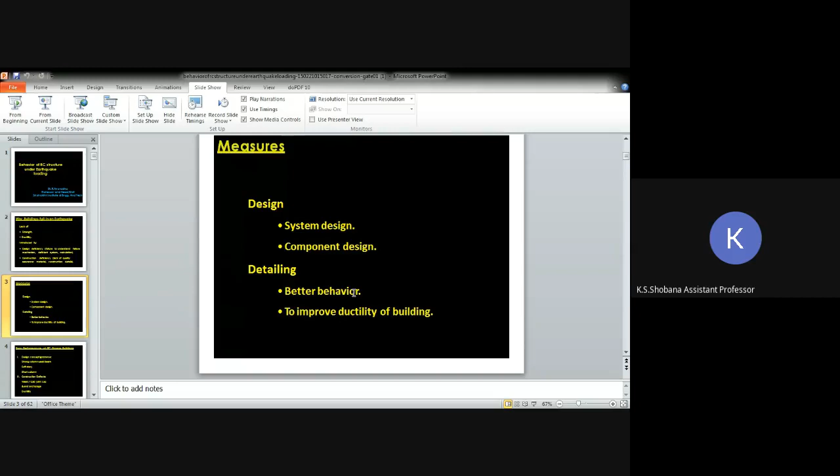It has changed, okay, now it is changing now. Yes, change ma'am, okay?

Okay yes ma'am. So again, I'm repeating why buildings fail in an earthquake. This is due to lack of strength and ductility. Strength, we civil engineers know is very important, and as structural engineers we should know what ductility is - buildings fail due to earthquake based on this.

This is introduced by design deficiency - due to failure to understand the failure mechanism, deficient system, and calculations in the design. Deficiency in calculation causes the structure to fail due to earthquake.

Next, construction deficiency - mainly we have to concentrate on the quality of material and construction detailing given to the structure. If both deficiencies occur, then the building fails. This is a general thing.

While going for the measures we have to take, we go for design and detailing. In design, there is system design and component design. In detailing, better behavior improves the ductility of the building, which is very important for earthquake structures.

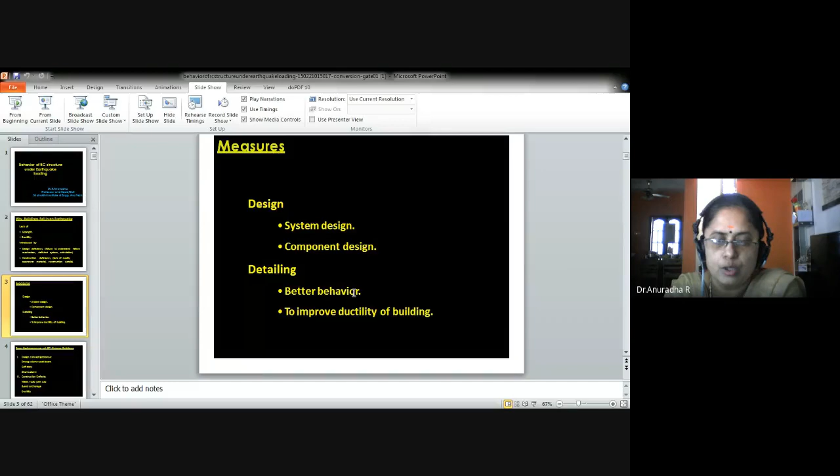So here we are going to see the behavior of the structures - how they behave in an earthquake - not about the measures. This is a general thing. Next is poor performance of RC frame buildings.

How do framed buildings perform poorly when lateral force or earthquake occurs? This is mainly due to two concepts: one is design concept ignorance, and second is construction defects. Design concept ignorance comes under strong column-weak beam, soft story, and short column.

We will see these one by one in the upcoming slides. The second concept, construction defects, is due to weak or cold joint, lapping, anchoring, and ductility - specifically lapping of reinforcement, anchoring of reinforcement, and ductility.

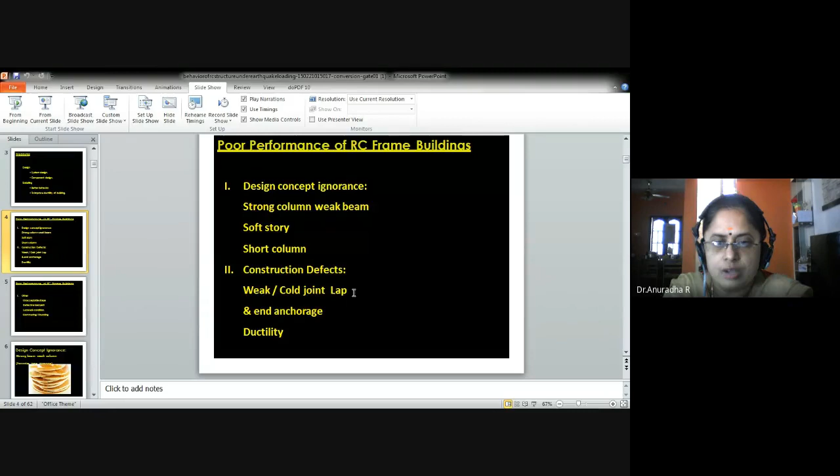These defects cause poor performance of the structure whenever lateral force occurs.

Next, other general issues include unacceptable shape. Generally, structural engineers don't concentrate on shapes, but architects focus only on shape and aesthetic appearance. If an unacceptable shape occurs, there is a chance of collapse in the structure due to earthquake, along with defective load path.

We know very well how load should transfer from the slab to the soil - a defective load path makes the structure fail. Local soil condition is also very important nowadays - without a geotechnical certificate, we cannot proceed with any structural consultation or construction.

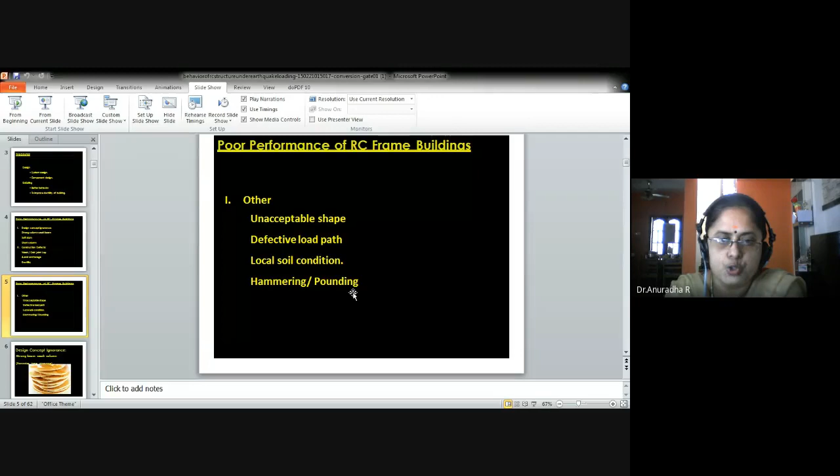Next is hammering and pounding, which happens in loose soils. Next, we will see design concept ignorance first.

So, strong beam-weak column concept. Here you are seeing pancake type damage - have you ever seen this type of damage in any structure? What is pancake? See how it collapses one by one, floor by floor. Have you ever seen this type of damage in any structure?

So we will see that. Here you can see this pancake type damage. All the beams are very safe, but all the columns have totally collapsed. This type of collapsing structure due to the earthquake we call pancake type damage structure. This type of structure happens whenever the beam is very strong and the column is very weak, resulting in pancake type damage.

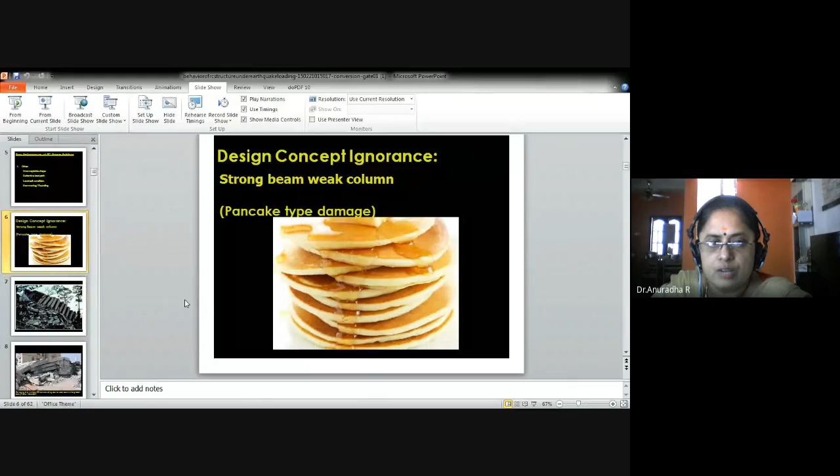You can see the pancake, one over the other, just like this structure is also one over other. But there is no column, all the columns are totally damaged. This is one of the collapses of a multi-story RC frame building due to weak column, strong beam design. This happened in the Bhuj earthquake in India in 2001.

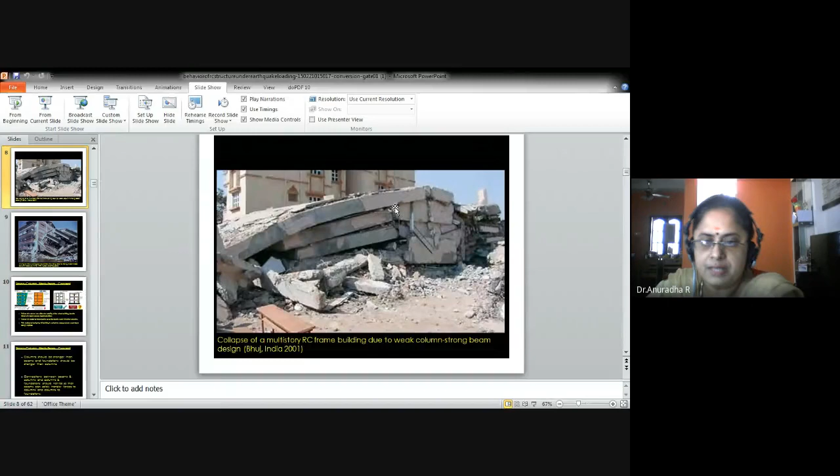Again you can see the beam is very strong, so the slab and beam are safe here but the columns are totally collapsed. This is called pancake type collapse, occurring due to the strong beam and weak column concept. Here is another example: multiple story collapse in a 6-story building due to strong beam and weak column design in the Turkey earthquake. Here also all the beams are safe, but no columns remain between the floors.

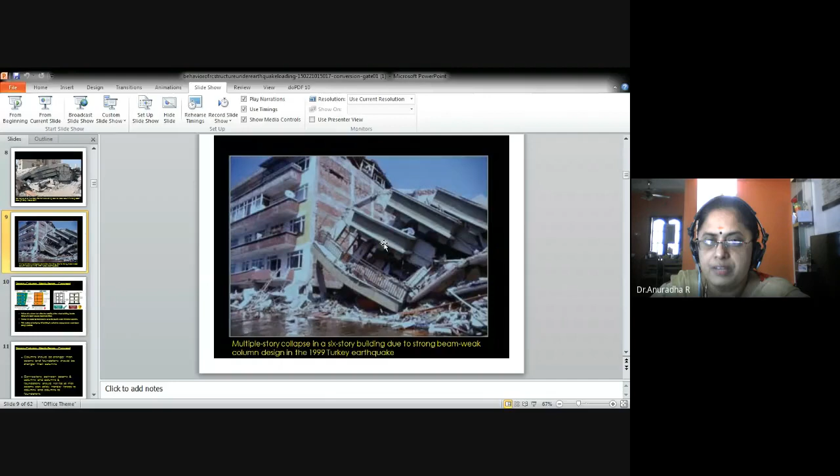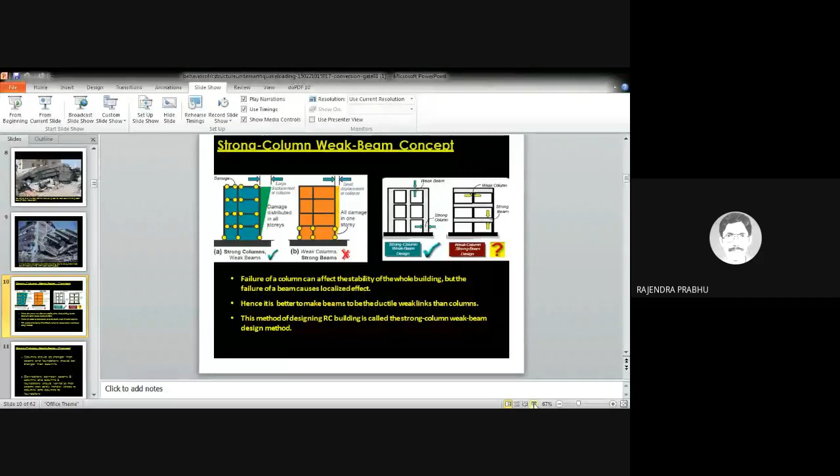Madam, can you please make it full screen? That is what I have made, sir, but it is not coming. Can you see it now? No, it is not full screen actually. Ma'am, there is an icon at the bottom portion of the screen. Oh yeah, that one. Is it showing, sir? No, not yet. I did this also from the beginning, from the top. Again, can you see it now? No, not yet. I don't know what happened. If you are seeing on mobile, you can make it somewhat bigger so you can see the pictures. Can it start, sir? Can I start? Yes ma'am.

Okay, we'll move on to the strong column and weak beam concept. In the first figure you can see strong columns and weak beam. Now the slide is in the first title slide, ma'am. Okay, now it's okay.

So all the columns are very, very strong compared to the beams. Here you can see strong column, weak beams. The beams are totally weak compared to the column. This concept is given here: strong column with weak beams, where the beams are totally weak and the columns are very strong, as shown in the first figure.

So whenever lateral forces occur, or the earthquake occurs, vibration occurs, we call it a lateral force. Whenever it occurs to the structure, there will be a large displacement at collapse, and damage distributed in all the stories. You can see these yellow circles, this is where damage occurs, in all the stories. This makes the structure somewhat safe, so we can save the lives of the people inside if this type of concept is used.

Whenever it's weak column and strong beams, the displacement is very small at collapse, and all the damage occurs in one story only, because all the beams are very strong. There will not be any ductility occurring in those beams, and all the load is taken by that particular story only. So all the columns fail there, making the structure fail and collapse totally. So this weak column, strong beam concept we should never use.

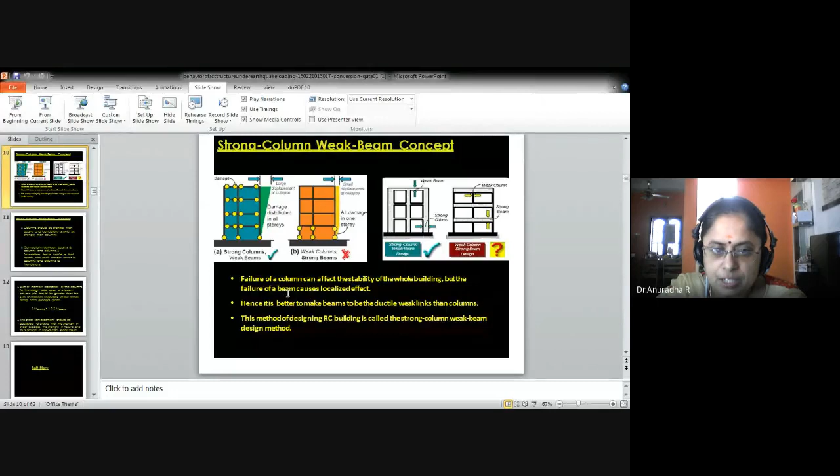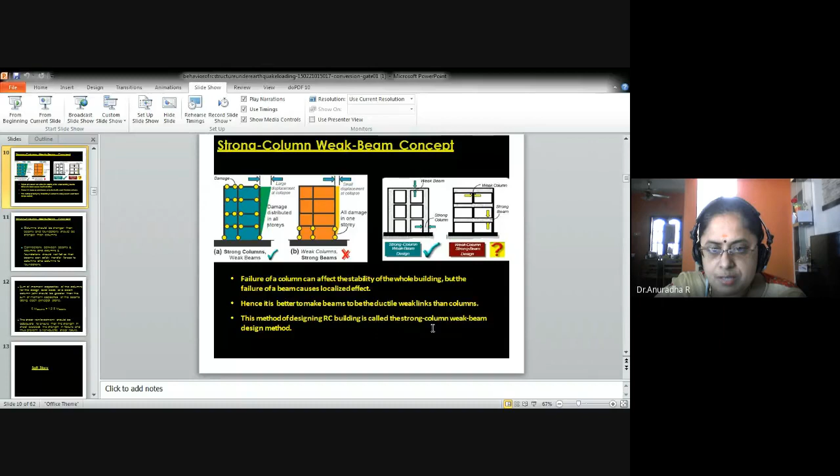This localized effect is due in the ground floor itself. Hence, it is better to make beams ductile, that means weak. We always say that an under-reinforced section is better than an over-reinforced or balanced section. So for this ductility, beams should be the weak link compared to columns.

This method of designing RC buildings is called the strong column weak beam design method. Columns should be stronger than beams, and foundations should be stronger than columns, because all the loads taken up by the column will go to the foundation only. So the connections between beams, columns and foundations should not fail, so that beams can safely transfer forces to columns and columns to the foundations.

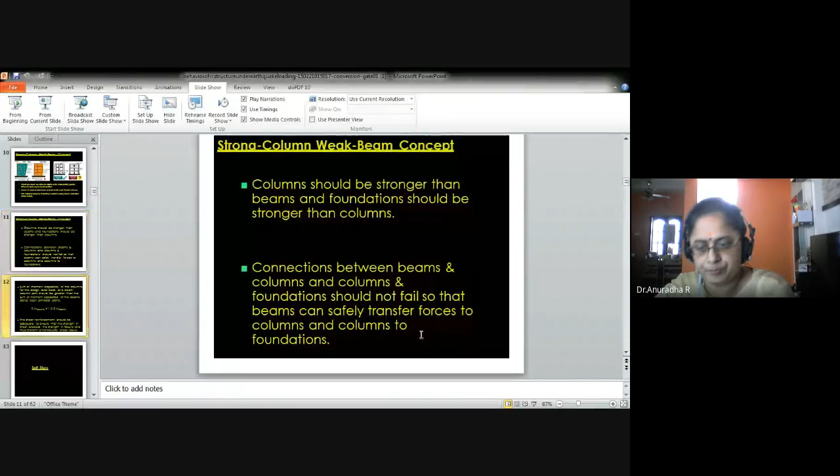The sum of moment capacities of all the columns should be greater than 1.2 times the sum of moment capacities of the beams, for the design axial loads at a beam column joint, along each principal plane.

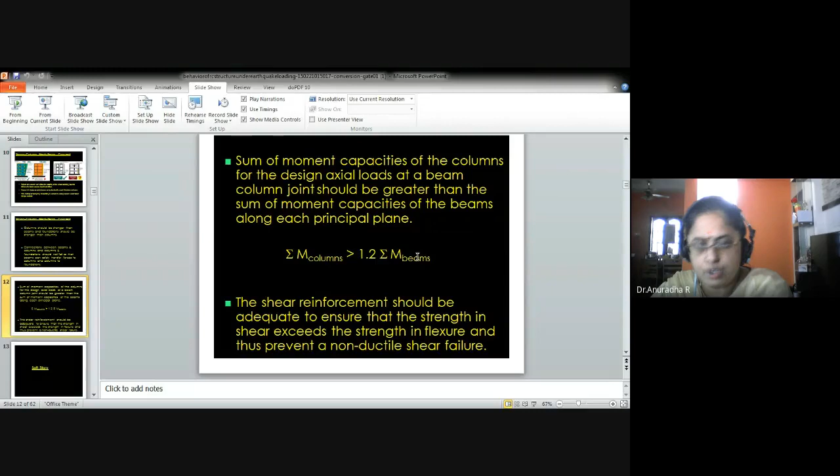The shear reinforcement should be adequate. We have to concentrate more in earthquake affected areas to ensure that the strength in shear exceeds the strength in flexure, and thus prevent a non-ductile shear failure. So shear failure should not occur. Shear reinforcement is very, very important, we should concentrate on that also. So these are all the things for the strong column weak beam concept.

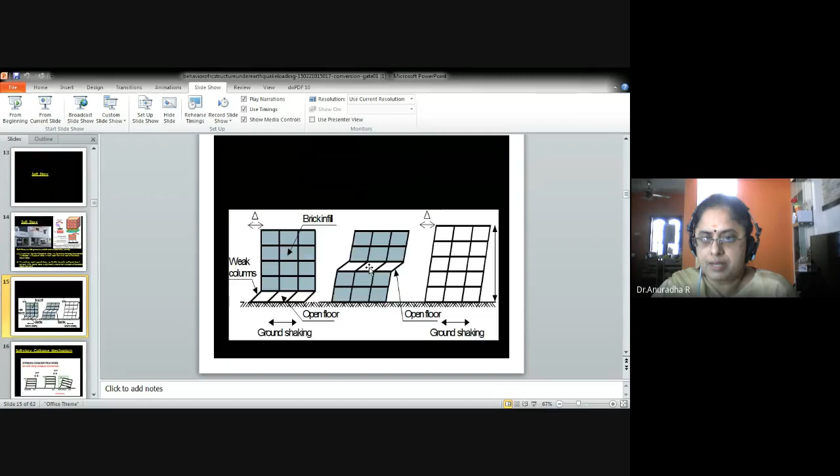Next, these are the weak columns, because all the brick fill is above the ground floor. Whenever ground shaking occurs, the open floor is affected first, and stress concentration will be more at this part. Sometimes it may occur in one floor where there is no brick fill while all other floors have brick fill, such as the second or third floor being affected due to ground shaking. We will see this in the examples in upcoming slides. This is the soft story mechanism, showing how stress concentration occurs.

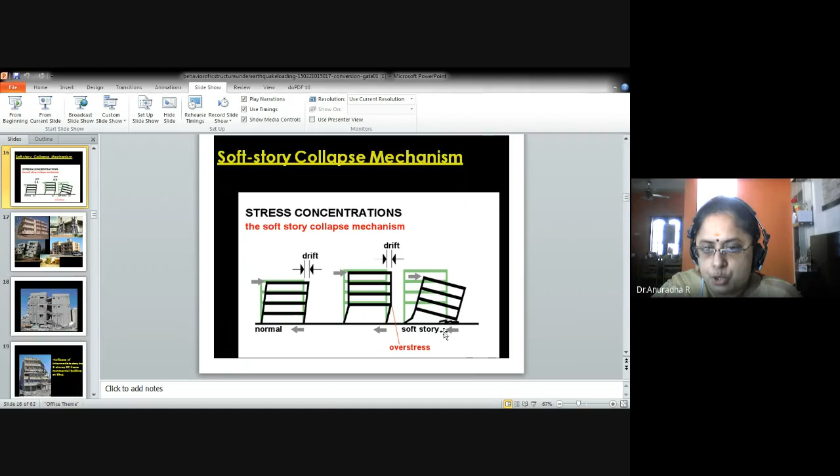In soft story collapse mechanism, there is displacement between the structure whenever lateral forces occur over the earth. But this is a normal one. Whenever the soft story is coming, the drift will be high, and all the stress concentration will be at the opposite side of the lateral force occurring. So in soft stories, this will totally collapse because all the loads will be taken up here, and due to this overstress, it collapses. This is the stress concentration, or the soft story collapse mechanism.

Here are many examples. This building, you can see, has no car parking space. It was totally damaged, and the building totally sat down on that particular place. Here you can see, due to overstress, these columns totally collapsed. This column had high stress concentration because of soft story, so it was just tilting over. Here also you can see the building totally collapsed at the ground floor.

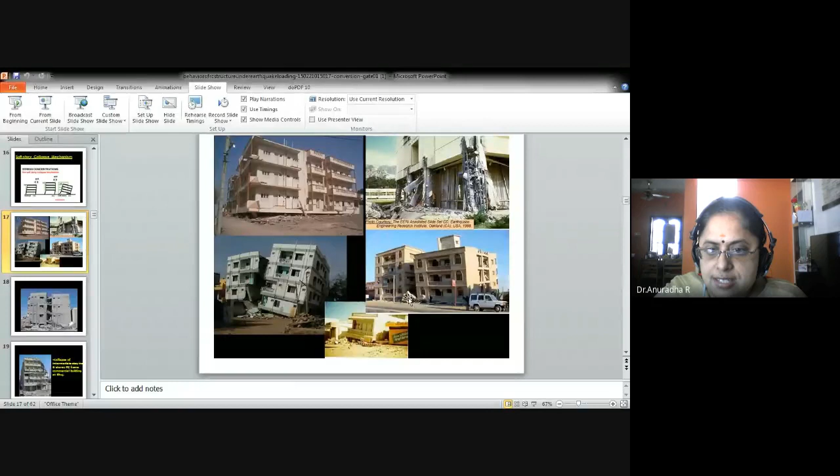Here you can see the same type of failures occur. Due to this, the connection between these two buildings also collapsed. You can see the height of the building - the total concentration of stress will be higher here. Due to that, the structure collapsed and the height is totally damaged. You can see the height of the building, so the connection between these two structures was also damaged.

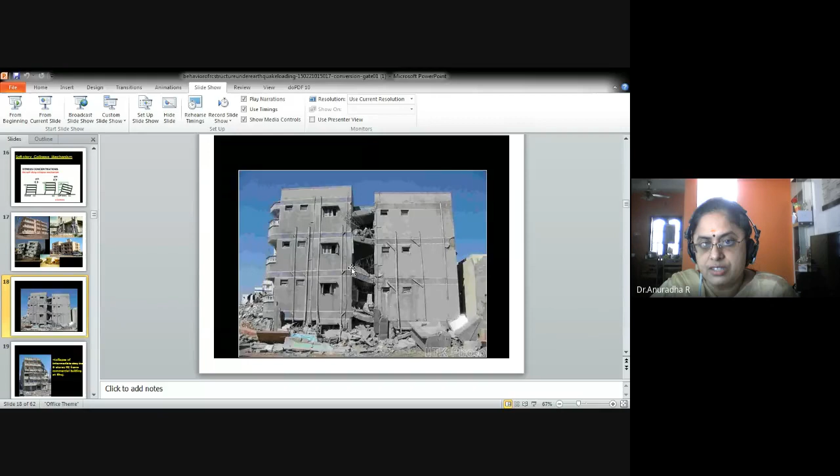This collapse occurred on the 6th floor. As I have told, whenever any floor has no brick fills or is totally open, that particular floor may get damaged. So collapse of the intermediate story in a 6-storey RC frame commercial building occurred in Bhuj.

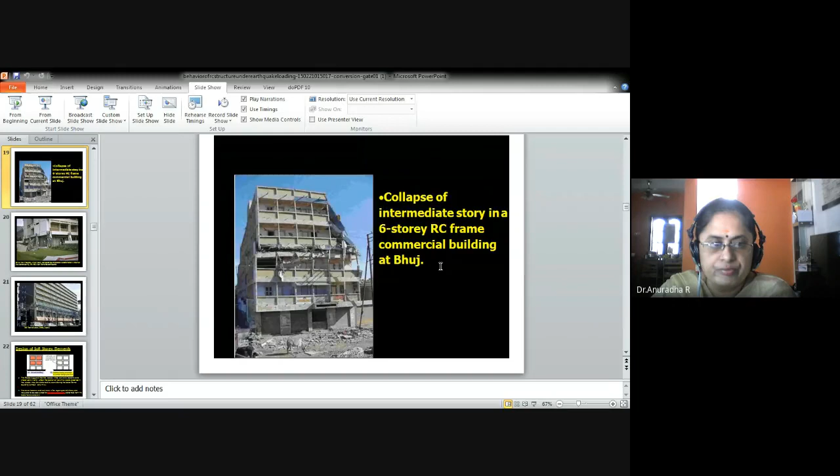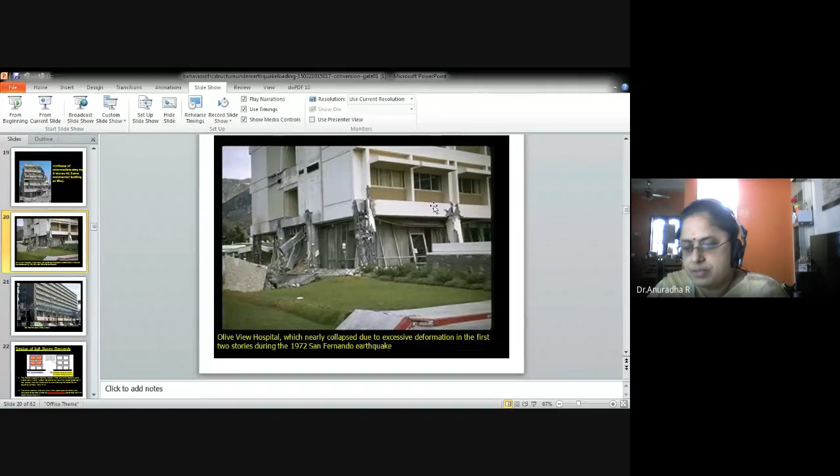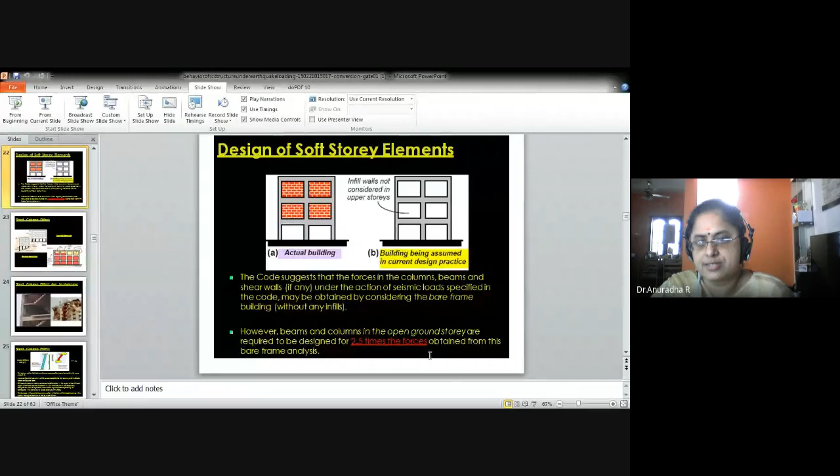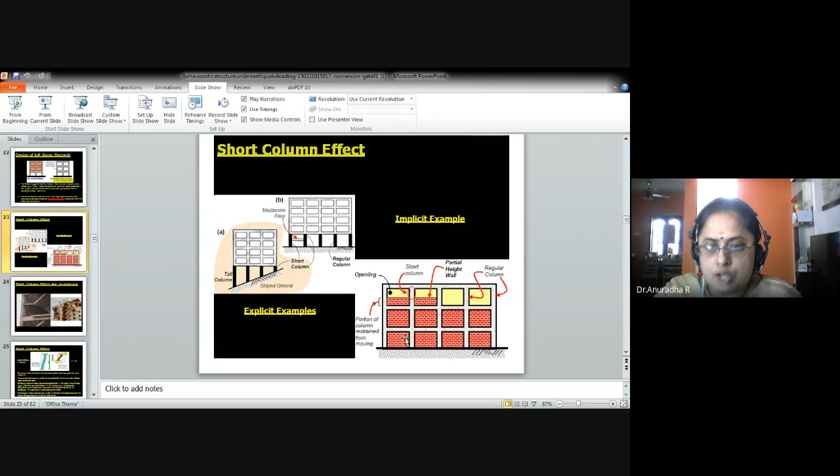This is some explicit example of what we see in our day-to-day life - the short column effect due to the staircase. The staircase is constructed at half of the column height, and this makes the column short at both the top and the bottom. This kind of failure may occur due to this short column effect whenever staircases are constructed in between.

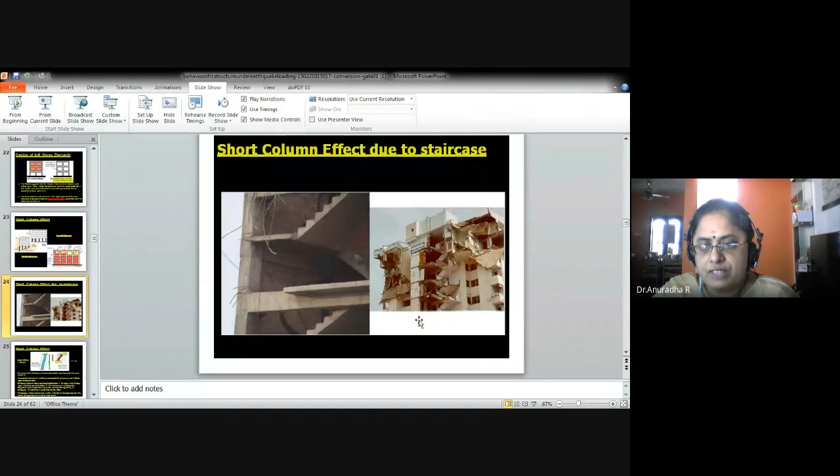Okay, short column effect. This is due to lateral stiffness, 12EI by L cube. So this is the long column and this is the short column. We will see how it attracts the horizontal force or earthquake force.

Whenever an earthquake or lateral force occurs to the tall column, the displacement will be higher, but it attracts a smaller horizontal force. The short column attracts a larger horizontal force, that is F equals K into delta, where delta is the displacement.

Stiffness of the column means resistance to deformation. The larger the stiffness, the larger the force required to deform it. The short column is not adequately designed for such a large force, and it can suffer significant damage during an earthquake. This behavior is called short column effect.

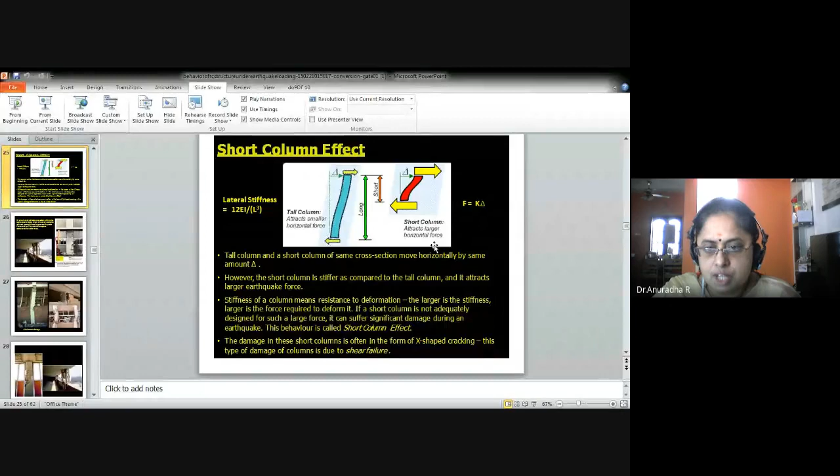So in this kind of thing, you can see the X-shaped cracking whenever damage occurs in the short column. Often we can see this type of X-shaped cracking. This type of damage of column is due to shear failure.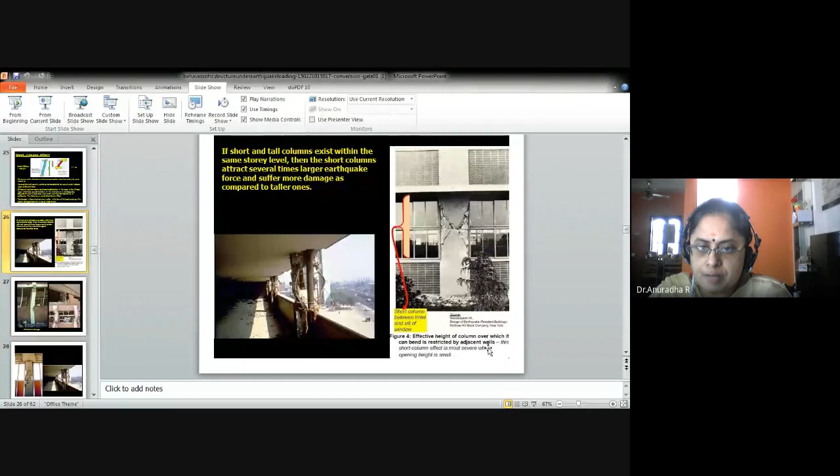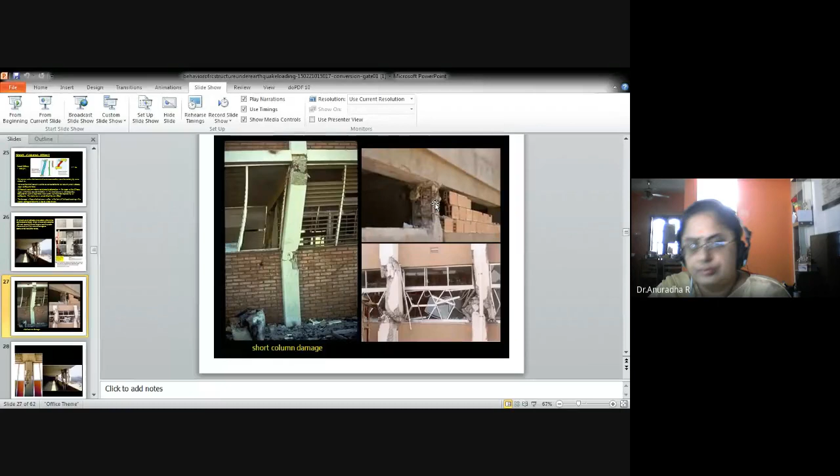So you can see this short column damage, as I have mentioned here. The infill is there, and the other portion is totally free, so it will be considered as a short column, and short column damage will occur due to the earthquake. Here also the same thing happened. Like balconies and such, this portion may be affected. Here you can see this column was totally affected due to the short column effect, and here also the same thing.

Okay, next we will move on to the construction defects. One by one we will see. This is due to joints, so the beam-column joint, it is very, very important.

Can anyone say whether this type of beam-column joint is correct or not? How should the reinforcement be given? What is the wrong picture shown here? Can you explain this please?

The reinforcement from the beam should be entered into the column, and similarly from column to beam.

Any one of you? Any other? I think the bearing is insufficient. Please, any one of you, someone else want to speak? I think what's lacking is more connection from the beam to the column, that's what I feel.

Any other? There are no ties in that junction. Okay, there are no ties. You are coming under shear, right? Shear reinforcement, column ties. There are no column ties in that. Okay, I'm talking about the beam-column joint, sir.

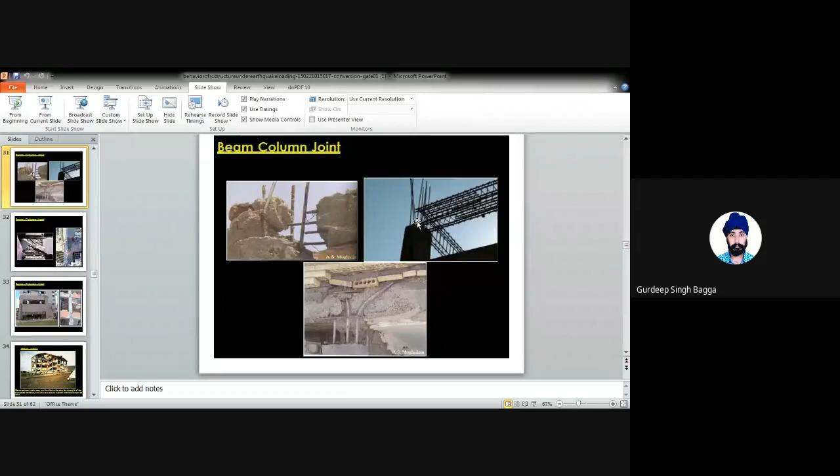So what happens whenever the earthquake... It seems simply supported actually, ma'am. Yes, what happens whenever the earthquake occurs to this type of structure?

Basically, the horizontal earth force will definitely cause the major damage, madam. It was totally collapsed because the beam will separate separately and the column will separate separately, right? Yes, madam, because there is no connection.

So what we have to do is the top main reinforcement should, within the development length, go into the column, and from the column it should come over the top, right sir? That is the joint connection. Am I right, or any other suggestions? You are correct. Yes, you are correct.

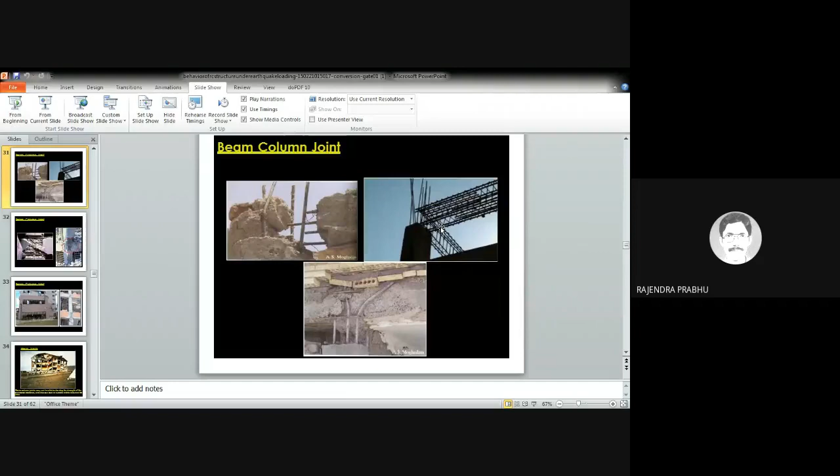Because at the top there is a hogging moment, and hogging moment requires development length. Otherwise it will act as a hinge, it will act as simply supported, and there is no moment transfer.

Yes sir, you're right. So this type of beam column joint failure happens when, locally, they are constructing structures in masons, giving buildings to small houses. So what they will do - they say it is a framed structure, but they will construct the column from the foundation and won't give any plinth beam, meaning from the bottom of the foundation also.

For general consideration I'm telling this. And also at the top they are giving the slab directly without giving connection between the columns and the beams, so they don't give any beams connecting with the column. They are simply placing the slab over the column.

This was happening - local masons, they are constructing houses and selling them. Since these are small houses they are doing that. Anyone agreeing with my point? Because they don't know about the technical things. I'm not blaming them.

Yeah, but the site engineer there, I think he can also - he has to monitor. But sometimes the engineer will not be there at a particular place, and also sometimes they may not have any experience. So this makes the structure get constructed like this.

But the people who are purchasing these types of houses don't know what happened technically inside the building. Due to the aesthetic appearance and all, they are purchasing the buildings. And if any type of damage occurs whenever an earthquake comes, only at that point do they realize this.

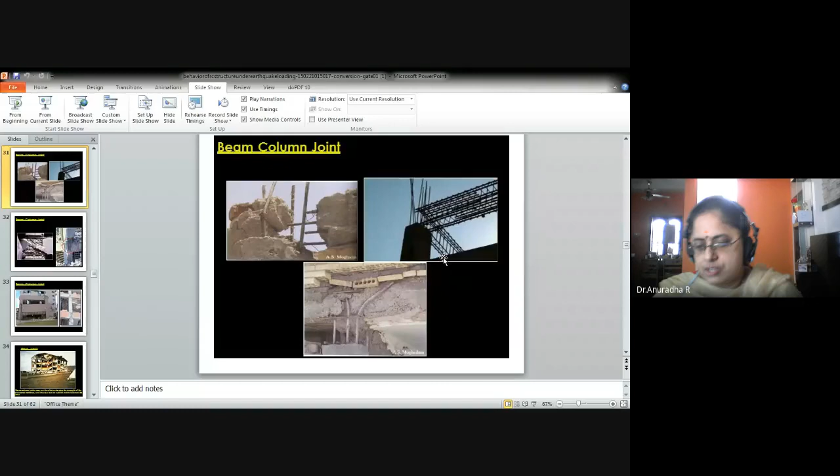So this beam column joint is a very, very important thing. That's why I said this, because I have seen many buildings nearby to my house also simply constructing just like placing the slab over the column. So I was totally astonished when I saw this type of construction.

So this is the beam column joint failure. You can see there is no connection between the beam and column joints. So whenever the earthquake occurred, it was totally separated. You can see here there is no connection between the beam and column, and it collapses.

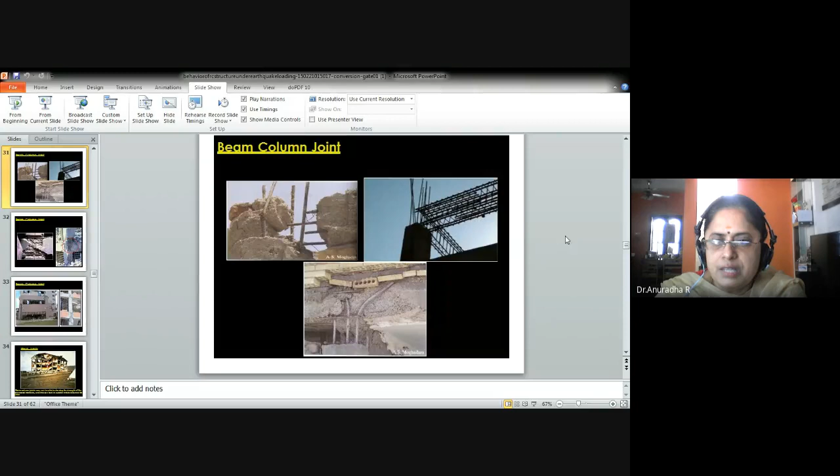You will see some - here also the same thing happens between the beam and column joints. So here you can see there is no proper connection between the beam and column joints, so the collapse occurred over here. Here also you can see there is no connection.

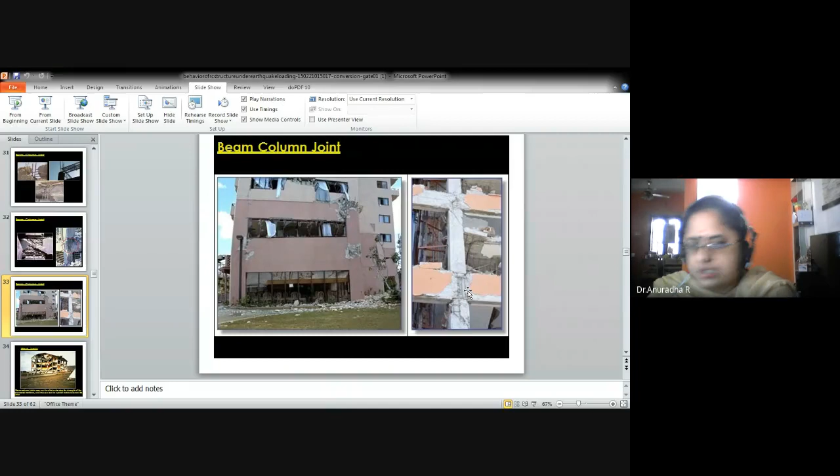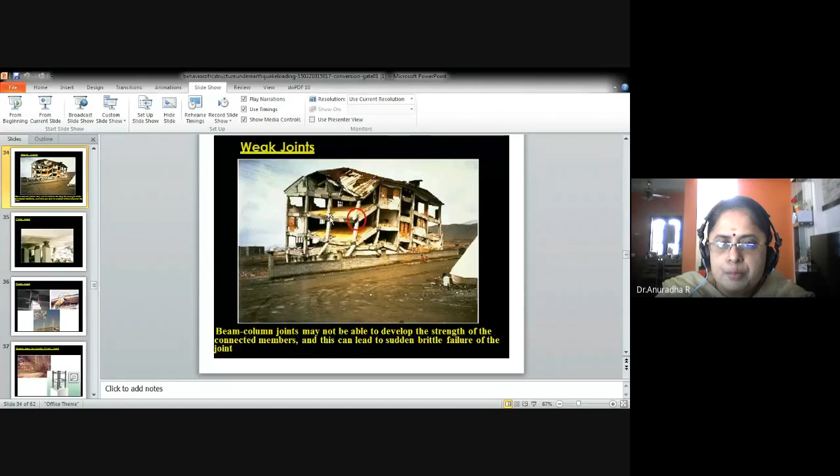I think the Richter level is somewhat low in this type of fracture, because only a small collapse occurred. Here you can see the beam column joints may not be able to develop the strength of the connected members, and this can lead to a sudden brittle failure of the joint - just like glass. This brittle failure occurred because of these improper beam column connections, and totally the structure collapsed.

Fantastic sir, you're correct. So whenever the concrete was totally hardened, they leave it for one day or due to some reasons - it's a plane of weakness, madam. Yeah, weakness is also there due to shear and all, but cold joint specifically is what sir told, correct. It is due to the concrete being hardened, and afterwards the next day they pour the new concrete.

There will not be bonding between the old and the new concrete. Am I right, sir? But practically it's not possible to avoid cold joint, because everywhere columns are casted. Columns have to be cast first, then beams and slabs are cast. So what remedial measure do we have to give for this particular problem?

Only at that reinforcement, at the junction of the reinforcement, beam column junction, proper ties should be provided, which is not possible practically. Can we say the technical term is a shear key?

The two batches don't mix properly, madam. It may be, sir. There may be a problem in mixing, or there may be a problem in concreting, hardened concrete over the new concrete, and whatever sir told, like there may be a problem in reinforcement. So all of this happens in the cold joint.

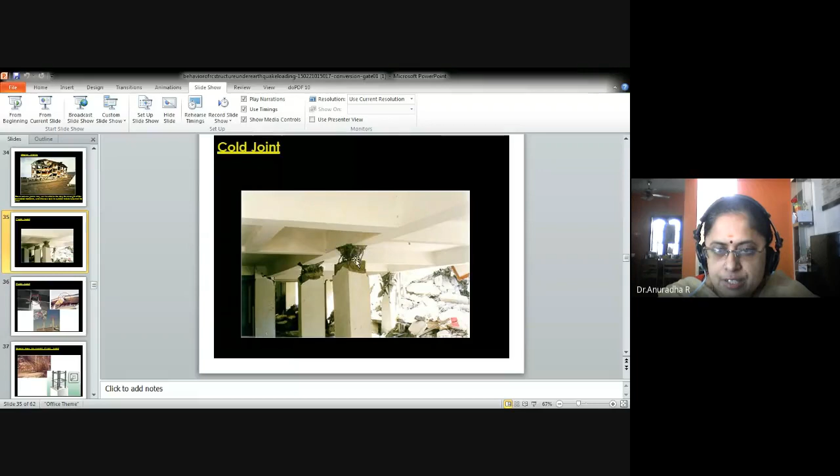Yes sir, you're right, so both things we have to concentrate on. One is concreting, and the second thing, whatever sir told, it was totally buckled due to the shear - reinforcement was not given properly at this particular junction. Am I right, sir? Yeah, correct. Okay, so this is what happened over here.

Next we will see. Here also the cold joint due to this shear, and also here you can see these kinds of problems occurred. You can see there is no proper shear reinforcement given over here.

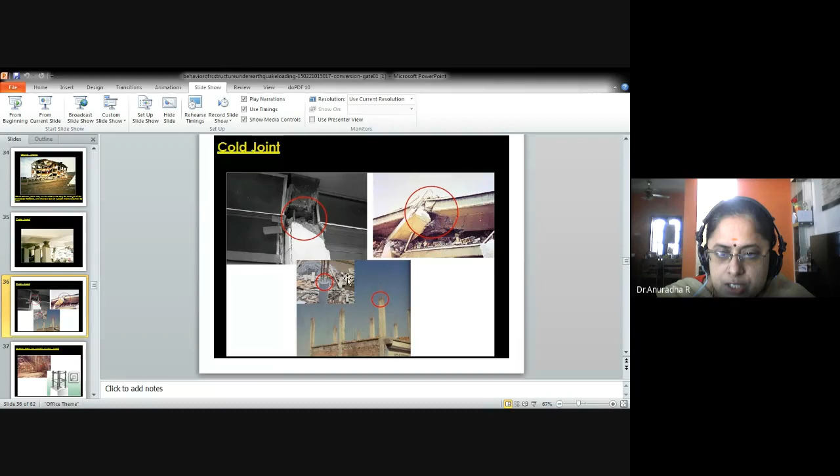So to avoid this, you have to give the shear key to avoid the cold joints. You can see this type of shear keys, and we have to provide this to avoid the cold joints. Meanwhile, we have to concentrate particularly on joints while doing concreting work - no time gap should be given.

That means we have to leave the concrete properly, and we should not leave it as such and continue the next day - that we should not do. We call that a cold joint also. But the main thing, whatever sir told, I agree with him - this is due to shear, so shear keys should be provided properly to avoid the cold joint.

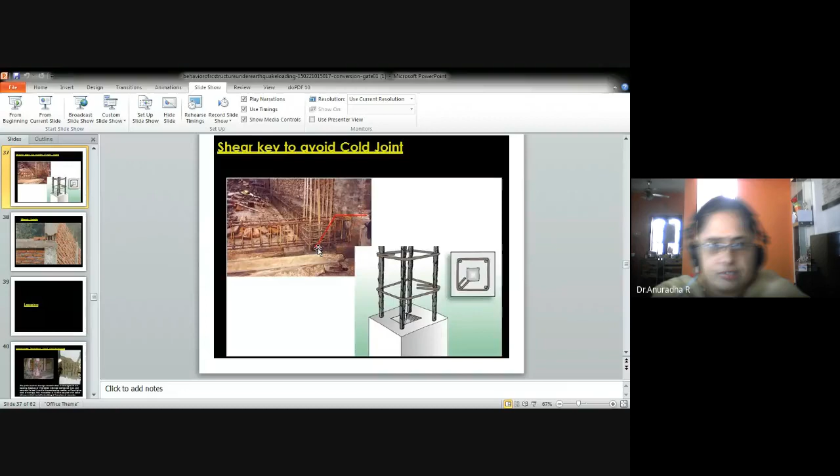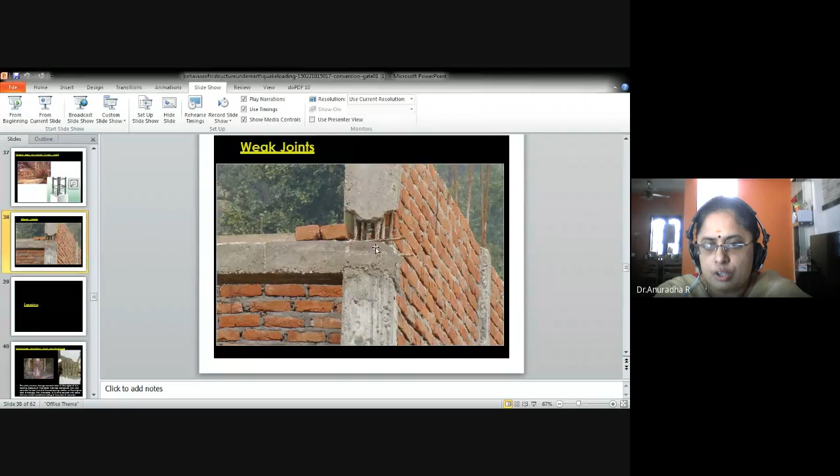Next, this kind of weak joints will be there. See, there is no reinforcement coming over here - beam reinforcement is coming out of the column, so there is no proper connection. We call this a weak joint. So they should not be there.

Okay, next coming to lapping. Can anyone say what is lapping in reinforcement? Where can we see this kind of lapping? Now, when the reinforcement is found short, because when we don't have reinforcement for the full length, then we have to join two pieces to extend the reinforcement. So wherever there is a continuity or a joint, we should provide sufficient development length.

That development length means we cannot weld the two bars from the end of one tip to another tip. Welding is not possible practically in the field, so we have to overlap it - overlap for development length. Yes, because IS codes also deal with lapping length, madam. Yeah, you are right, so lapping is development length. Can you say the development length?

How much we have to provide? It depends on the diameter of the bar. So lapping is 50 times the D, 50D. Yes, 50 times the diameter. For tensile and compression, there are two different development lengths for the same diameter.

So what happens is, with reinforcement, we could not go for 3 or 4 floors straight. We have to cut the reinforcement at a particular stage and connect it with the other reinforcement for constructing the upcoming floors. We could not directly join tip to tip because it won't support lapping. So we have to give some development length, whatever the code specifies, lap over the reinforcement, and then go for the next floor. Correct, sir?

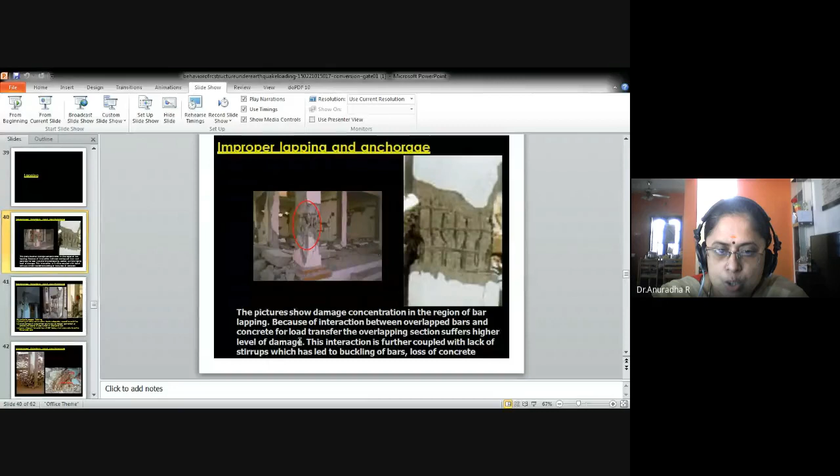This picture shows damage concentration in the region of bar lapping, because of interaction between overlapped bars and concrete for load transfer. The overlapping section suffers a higher level of damage. This interaction, further coupled with lack of stirrups, means there is no proper connection between the overlapping bar and the old bar, which has led to buckling of bars and loss of concrete.

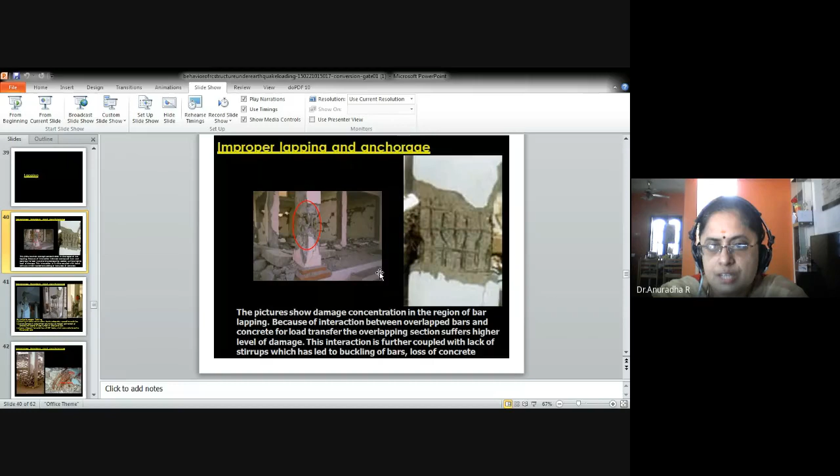Here you can see this type of failure occurred. This is improper lapping and anchorage. Next, the same thing happened here. You can see the main bars themselves are bent up, and here also you can see this kind of thing. The distance between these two stirrups is very high.

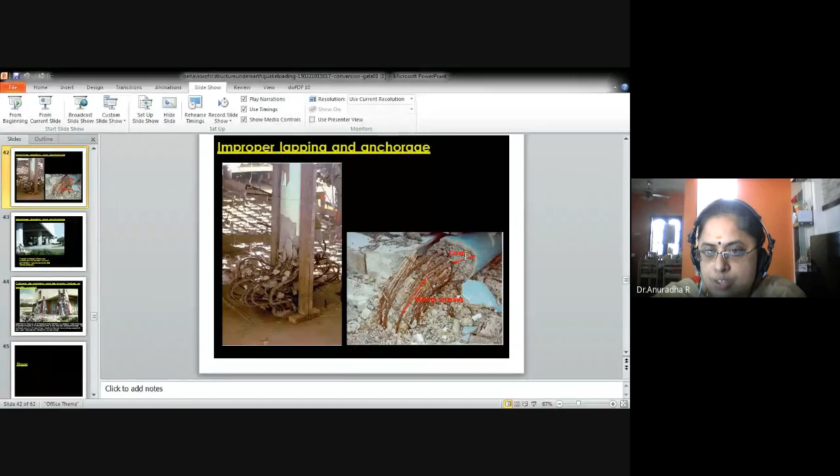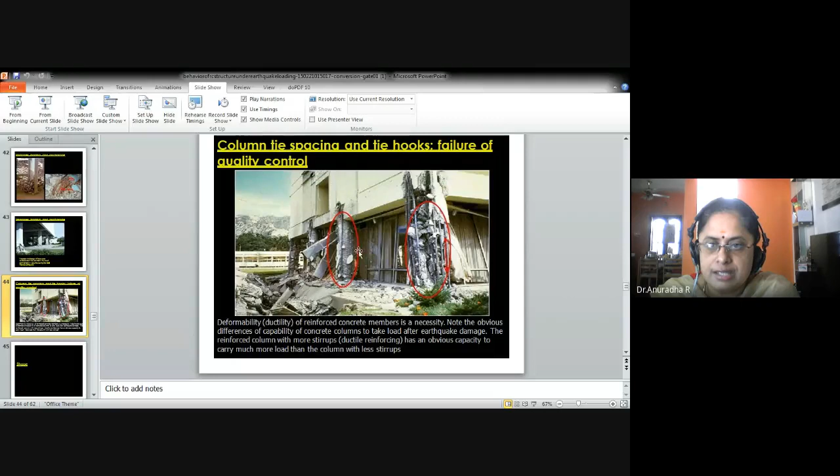Column tie spacing and tie hook failure due to quality control, and deformability of reinforced concrete members is necessary. Note the obvious differences in capability of concrete columns to take load after earthquake damage. Reinforced column with more stirrups, ductile reinforcing, has an obvious capacity to carry much more load than the column with less stirrups. Concreting work has been done properly, reinforcement is there, but there is no proper stirrups. It happens due to failure of the quality control.

Okay, next we'll move on to the shapes. So how does the shape cause failure? Can anyone say how the shape of a structure makes it fail during an earthquake? What do you mean by shape - the shape of a column or the shape of a building? No, the shape of the structure. It should be symmetrical. Yes, it should be regular shape. Okay, what happens if an improper or irregular shape is there?

In what sense, vertical type? If the vertical shape is not symmetrical, there will be torsion. Yeah, that's what I need. And in plan, if it is not symmetrical, at the junction it will crack. Suppose the building is in an L shape or C shape in plan, at the junction of the two wings, side A and side B, where they meet, there will be a crack.

Yes, you're right sir, so shape matters. Usually, Professor, the circular shape is usually better, that's what people tell. Circular shape - you mean in columns, sir? I'm talking about the structure.

Am I right, sir? You're talking about the column, right? No, madam, I'm not talking about the column, sir. I'm talking about the structural shape.

In a building, if the shape is symmetrical and regular, there is no problem. If the shape is not symmetrical, the problem occurs. As sir indicates, this is due to torsion.

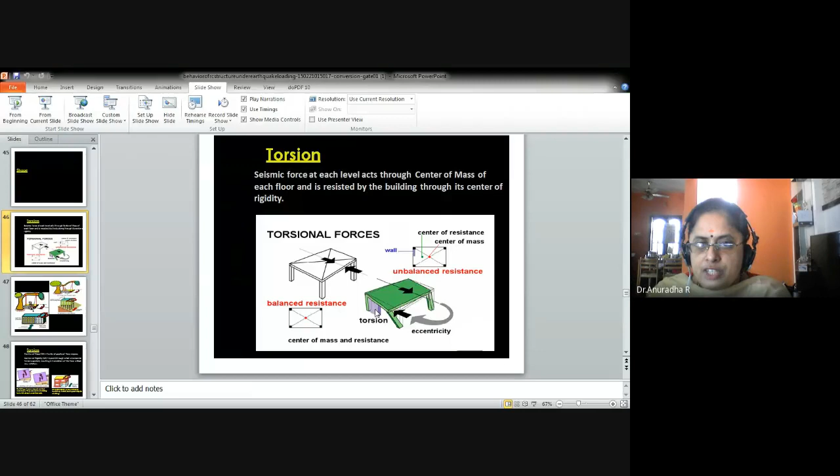So I have given a simple example: a girl swinging in a tree with two ropes at the same height. Here, swinging causes no problem even when a twist comes. But with unequal ropes, where one rope is shorter than the other, the swing with unequal ropes makes the structure twist.

Here you can see the heavy side of the building versus the light side of the building. The light side and heavy side make the structure turn, so twist occurs. During earthquake ground shaking, there is a short column and long column in sloped structures. Again, the building twists about the vertical axis, creating a twisting moment.

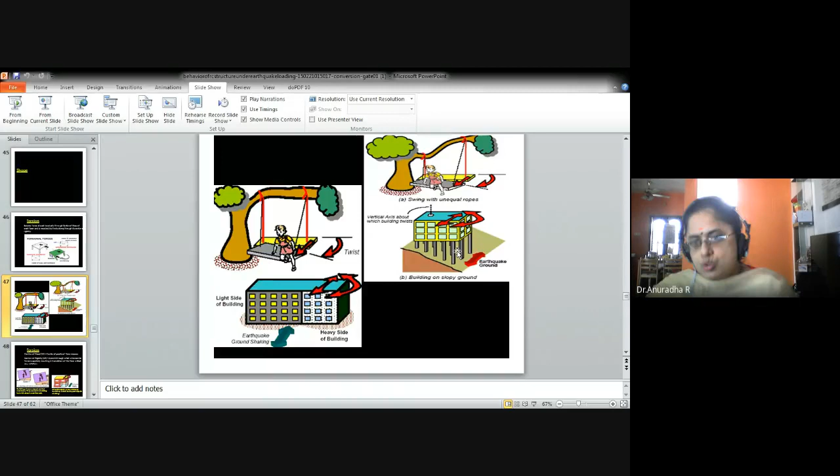So I've given a simple example. To define torsion: center of mass equals the center of gravity of floor masses, and center of rigidity equals a point through which a horizontal force is applied, resulting in translation of the floor without any rotation.

Buildings with unequal vertical members cause the building to twist about a vertical axis. The walls and columns will twist about a vertical axis in a plane. A one-side-open ground story building twists during earthquake shaking.

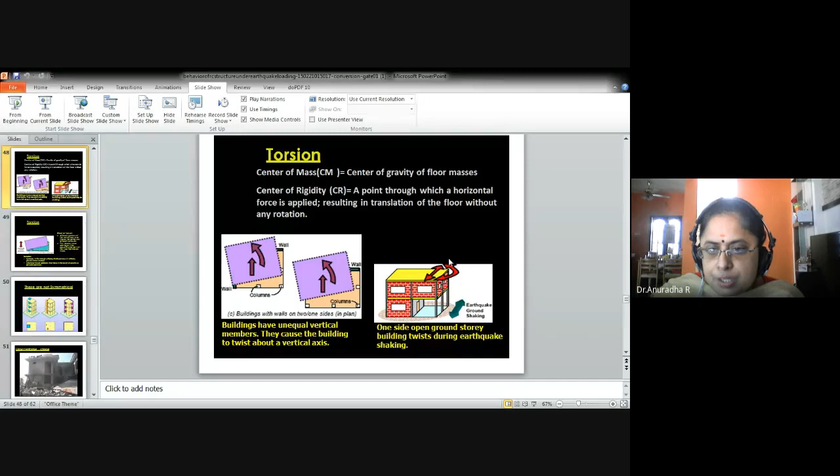So this is what I was talking about regarding shapes. Here you can see this area was totally free, and the shape shown here is unequal. This makes the structure twist at this particular point due to shaking.

During this earthquake movement, these columns are more vulnerable. Different portions of the same floor level move horizontally by different amounts, causing more damage to the columns and walls on the side that moves more.

The remedial measures we can go for are symmetry in plan through uniformly distributed mass and uniformly placed vertical members. Otherwise, include additional shear forces in the design of columns as per codal provisions.

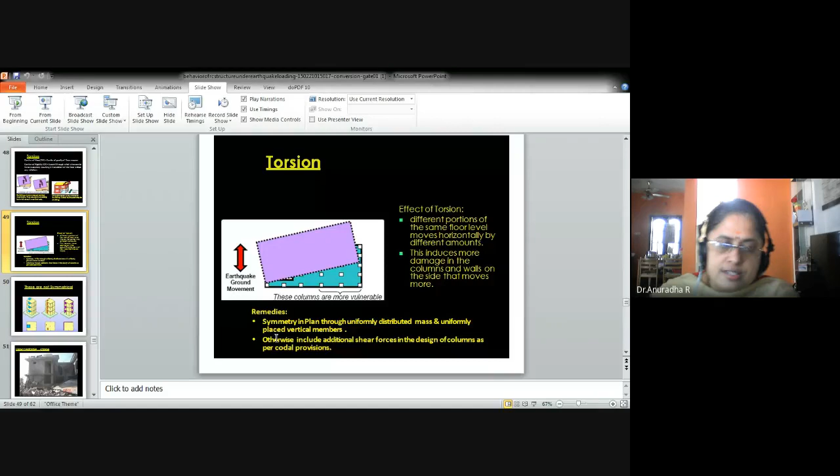We cannot always go for symmetry, because sometimes for aesthetic appearance we have to go for unsymmetrical plans also. In such cases, we should account for additional shear forces in the design of columns as per the codal provisions, otherwise earthquake distortion cannot be avoided.

So these are some unsymmetrical areas of buildings. Here the load will be very high, here it is less, and you can see this violet color shows that if this type of unsymmetrical condition exists, there is a chance for torsion occurring over the structure.

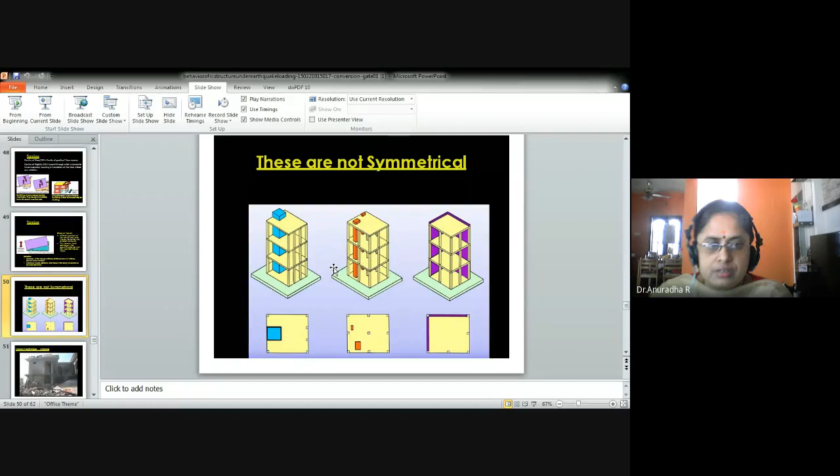So this is an unacceptable shape. Here you can see the building is constructed like a C-type construction. If it is like that, there will be a chance for twisting, and due to that, failure may occur.

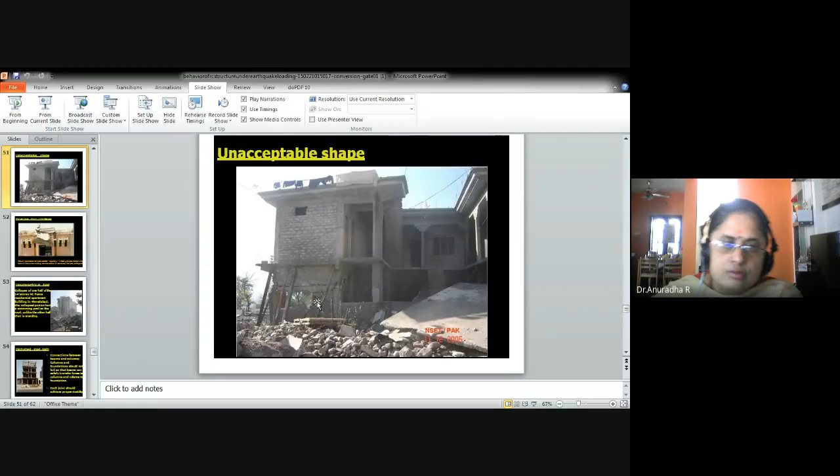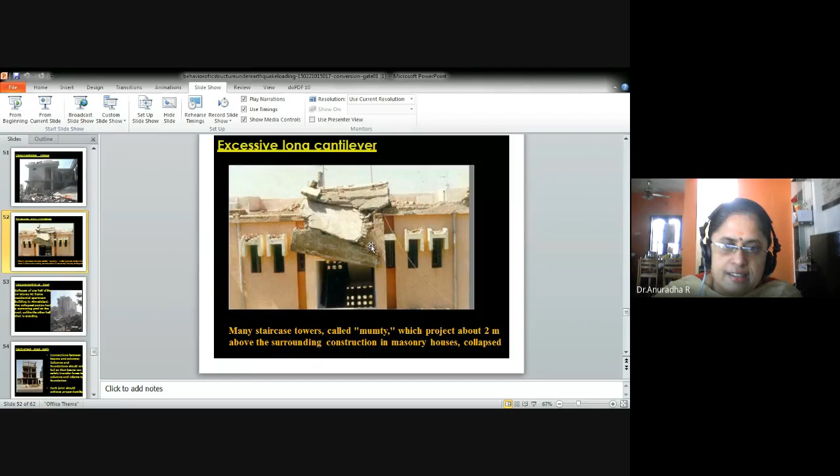Here the excessive long cantilever slab has been given in this particular area. Many staircase towers called mumty, which project about 2 meters above the surrounding construction in masonry houses, were totally collapsed. This is due to the excessive cantilever, which created an unsymmetrical load.

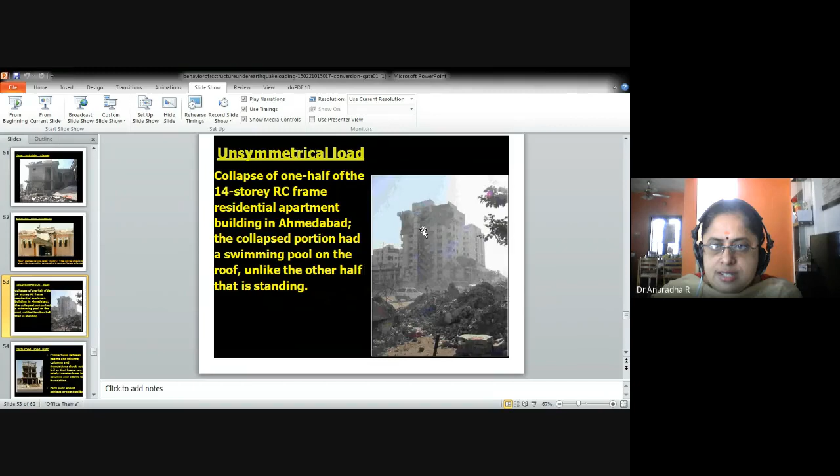Collapse of one half of a 14-story RC frame residential building at Ahmedabad. The collapsed portion had a swimming pool on the roof, unlike the other half that is standing. One portion totally collapsed while the other remained standing, because the half with the swimming pool had a large twisting moment at the roof, unlike the other portion. This happened in Ahmedabad.

Even when there is no earthquake, the loads are not transferred directly to the soil, but transferred to the beam, and the beams become weak. How does load transfer occur in a building? Slab to beam, beam to column, column to footing, and footing to soil.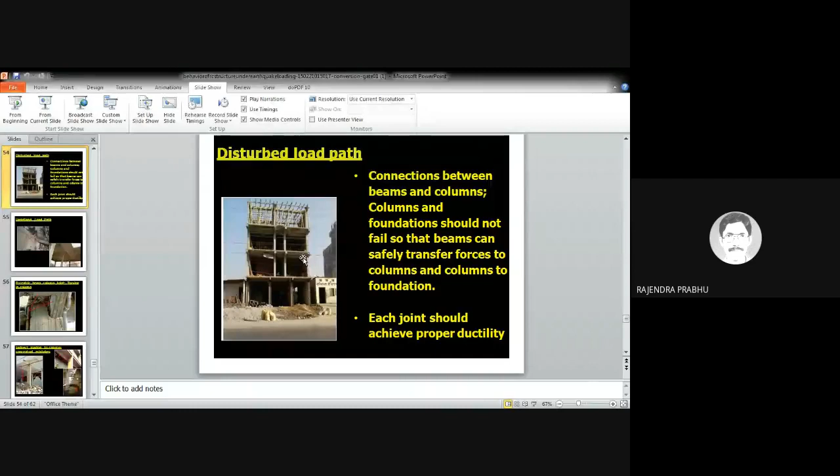The connections between beams, columns and foundations should not fail, so beams can safely transfer forces to columns, and columns to foundation. Each joint should achieve proper ductility. But here, all the forces from half the structure go from slab to beam, beam to column, and column transfers the load to the ground floor column, to the footing, and to the soil. But there is no chance of distributing the load path to the soil, so this disturbed load path makes the structure collapse.

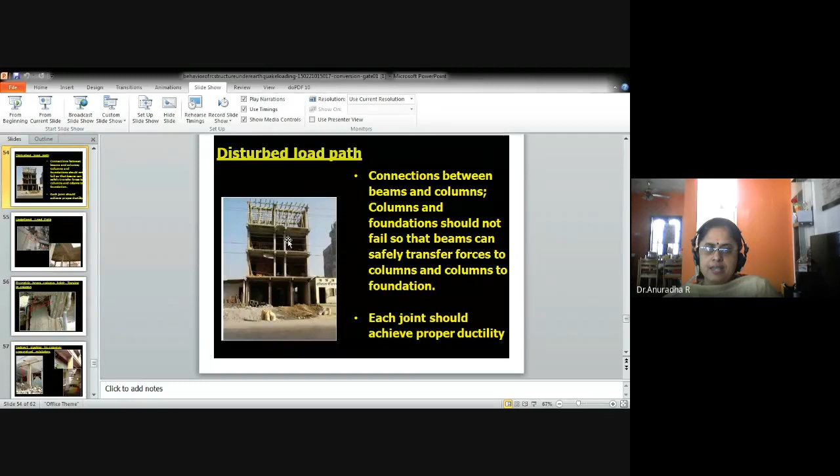So this is the undefined load path. Can anyone explain these two pictures? Can a structural engineer design like this? Which picture, madam? The right bottom? Yes, right bottom.

The beam should always be supported by the columns. What is happening here? The beam is not supported on the column. So the beam and the slab will both fail. There is no proper connection between the beams and the columns. If you see, here is a beam, here is a beam, how were they connected? There is no defined path of beam and column connection. Here too, the beam totally collapsed because it was not properly connected with the column.

So with this undefined load path, how will the load transfer here? It is totally confused, actually. This undefined load path makes the structure fail in this type of case.

Madam, but at the design stage... Yes. May I talk, madam? Yes, sir. But at the design stage, if this particular beam is well designed, then the load from the beam to the column can be well transmitted, madam. That's what usually people do when the floating column comes into picture, madam.

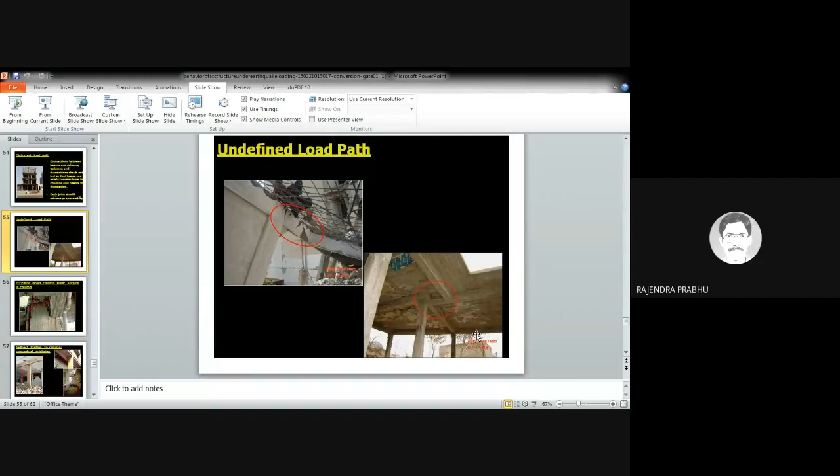Too much heavy reinforcement would be needed. Then only it will take the floating columns and also the above structure. Yes, correct. So that's what the undefined load path means.

I'm talking about the beam and column connections overall. It should be properly defined and the load should be properly transferred from the beam to the column, and from the column to the footing. That's what I wanted to explain.

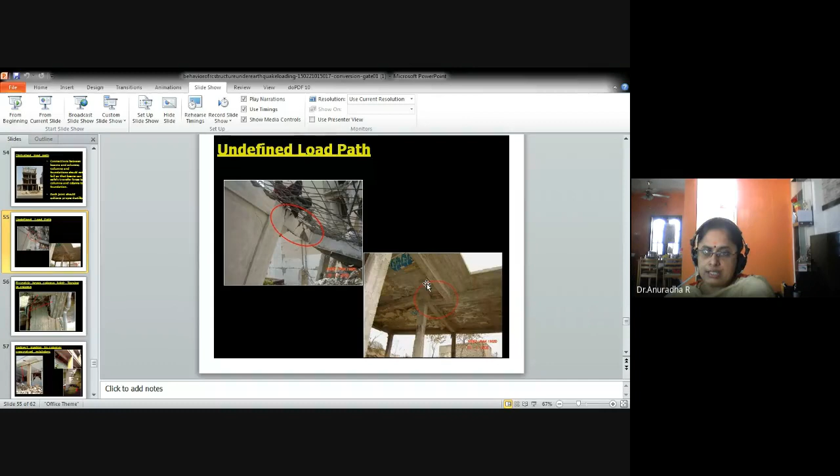But if we're going for any aesthetic appearance, the floating column we are accepting. But whatever was said, the beam should be designed properly.

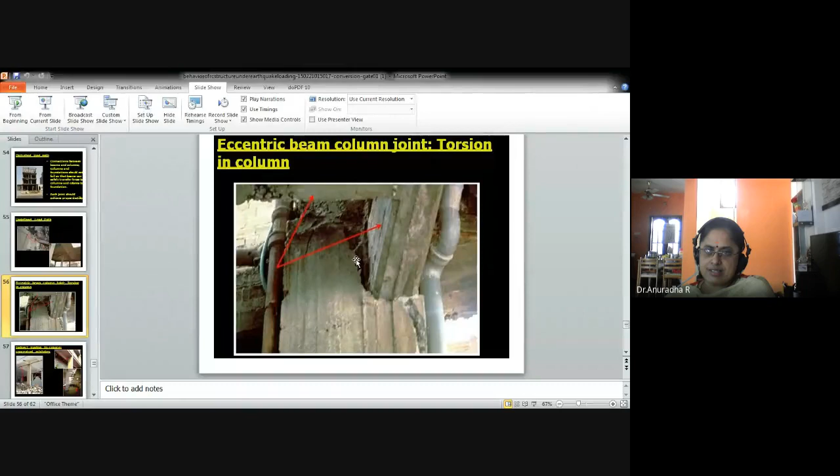It was a very big beam and the reinforcement will be very heavy on that particular beam. So next we'll see the eccentric beam column joint. Here you can see the column is this much high, and the beam was connected in the eccentric portion. This makes the column prone to torsion buckling whenever earthquakes come. So this is indirect loading to the column. This is a conceptual mistake.

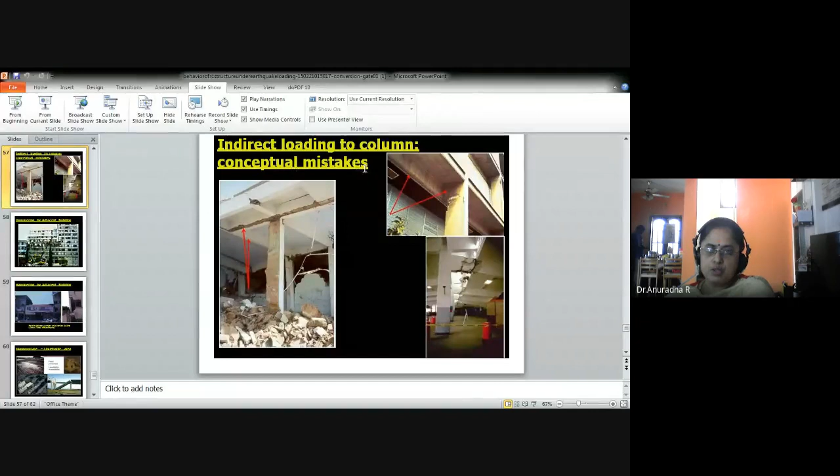You can see the column is there, and unnecessarily the beam is coming out. Here you can see some beams were constructed unnecessarily. So the beam is very high but the column width is different, and the beam and column connections were not properly done. So this is indirect loading on the column. This is a conceptual mistake actually.

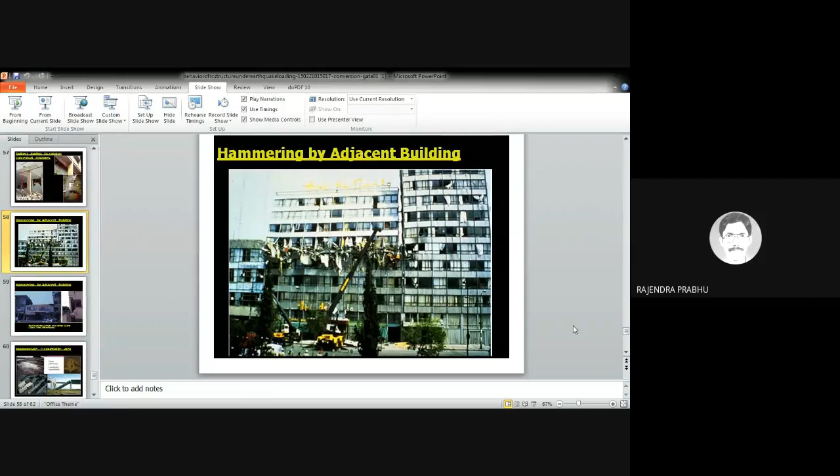I think you are from which state, sir? From Karnataka. Okay, so I think you didn't see that movie.

In that movie, what happens nearby is there was a very big construction happening, and due to the hammering of the pile foundation and the loose soil, it affected the nearby very big apartment. So totally the apartment collapsed due to this hammering action caused by the nearby construction. It was shown in that particular picture. That's why I asked the Tamil Nadu people if anyone saw that movie, but no one answered.

But this is due to the hammering action by the adjacent building. The title is hammering by adjacent building. This may be due to construction, or this may be due to intentional building demolition. No, at that time also this was happening. So this hammering action by the adjacent building makes the structure collapse.

Can you show the dynamic effect of the hammering operation, madam? Yes sir. Can you show some photos or any video available regarding hammering? No sir, I don't have any videos, I'm just showing here the photo.

This happened due to the adjacent building's hammering. So this structure collapsed because I think there is no infill in this particular floor, that's why this particular floor collapsed. Here you can see some cranes. So this was collapsed due to the hammering by the adjacent building.

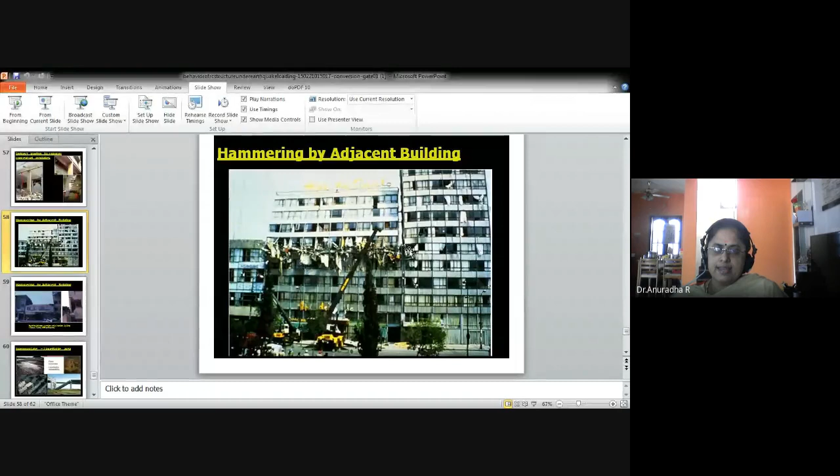Basically, the dynamic effect of the pile drilling, especially the natural frequencies, if they match, then resonance and all that effect may be there, madam. That's what I'm feeling, madam.

Yes sir, because of that, and also due to soil considerations we should take into account, because if the soil is loose, this makes the nearby structure also have improper settlements, which may happen in that particular structure too, due to this pounding and hammering action.

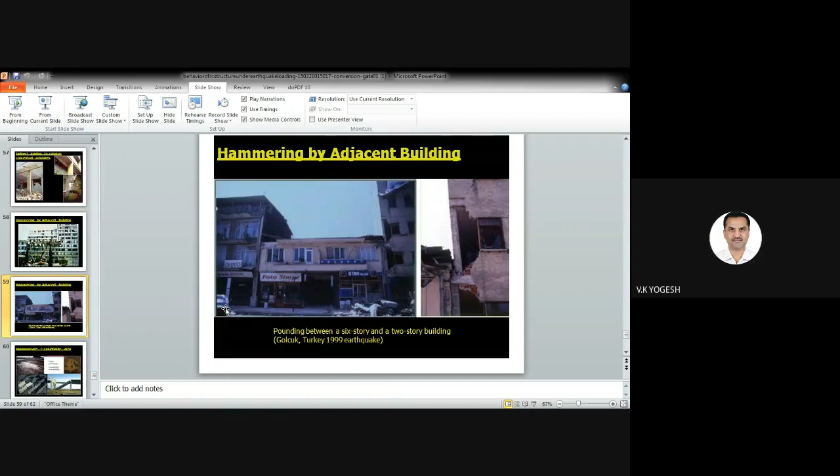I think these type of failures are very rare, right? Yeah, this is very rare, but I wanted to show what happens in that part, because this is the behavior of my structure. That's why behavior of a structure, I have shown this also. One way of solving this problem is leaving proper setback between the two buildings, right? Yes, you're right.

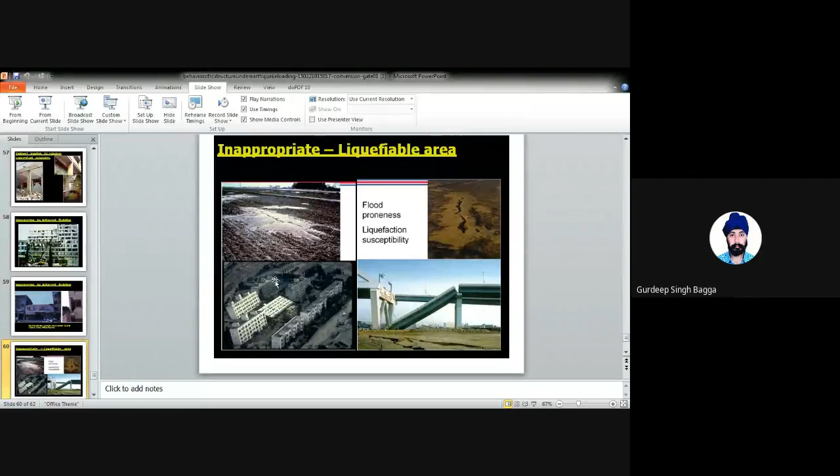If any building is constructed with soil considerations and properly constructed, it makes the structure stable whenever hammering action or anything happens nearby. I can understand, because in Bombay, structures are constructed nearby because there is no space for construction, population is very high, so they go for apartments like 25, 30 floors. In such cases, we have to consider the soil specifically, soil test should be done properly, proper foundation should be given. If it happens clearly, it never makes the structure fail whenever hammering or pounding action happens nearby.

So here also you can see inappropriate liquefiable area, flood proneness and liquefaction susceptibility. Actually, in Moulivakkam, Chennai, have you read this in the newspaper? This Moulivakkam building collapsed due to this liquefaction susceptibility. Can you read that news in the Hindu? A building in Moulivakkam, Chennai collapsed because that particular building was constructed in an area that was previously like a pond area, so it was totally a liquefiable area.

So now the pond was not there. What happened was they constructed that structure, half portion of the building in that particular pond and the remaining portion in the land area. This makes the structure fail because they have not tested the soil properly and proper foundation was not given. If it is inappropriate, then due to this, there may be a failure occurring.

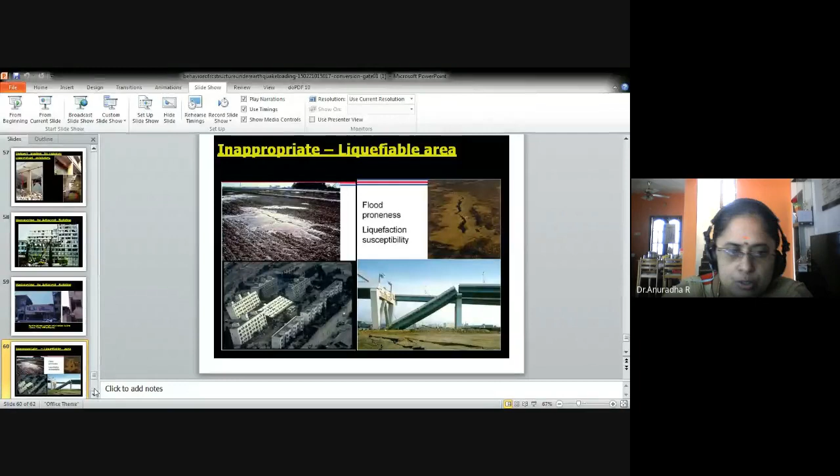Ma'am, do you also find some kind of structural norms for unplanned settlements? These norms work well in planned areas, like we have some setbacks and open areas. But when it is difficult to address such issues, is there any such norms being processed by the government or some authority, or any report done for the same? I was working in some urban villages and I observed that in case of any earthquake or natural calamity, it is really difficult to protect the building at that time of calamity. So I don't know, is there any such provision?

Have you seen such? Actually, while coming for earthquake ductility structure, if you want to make a structure earthquake resistant, you have to spend 40% more than the actual structure. That's the problem, so money is a very big problem. Economics is a very big problem there.

But for simple structures, you can refer to CVR Murty, he has given very small things. If you do this, you can save the structure and also save the life of the people. Please refer that, whether you are from urban or rural, small buildings can be safeguarded by using these small things given by CVR Murty. Please refer, it is available in Google, please check that. You can see some belts he has given from the foundation, lintel level and sill level, and how to connect the columns and beams. This simple thing makes only 10 to 20% increase in construction cost, but it makes the structure safe and also saves the life of the people. Please check that, sir.

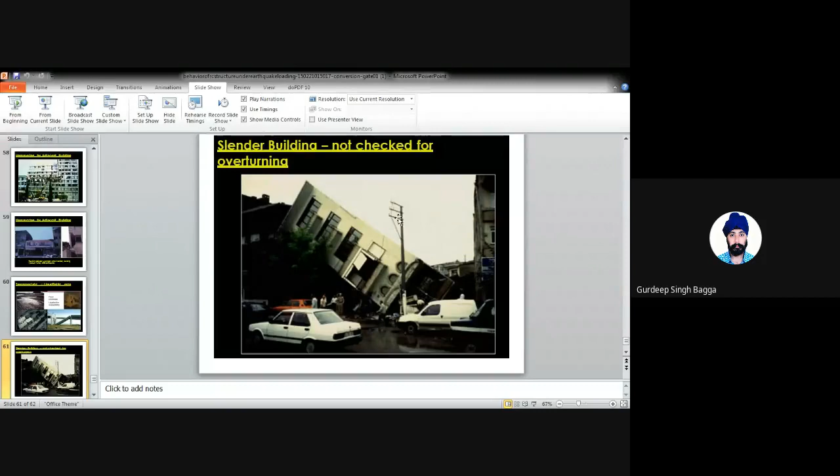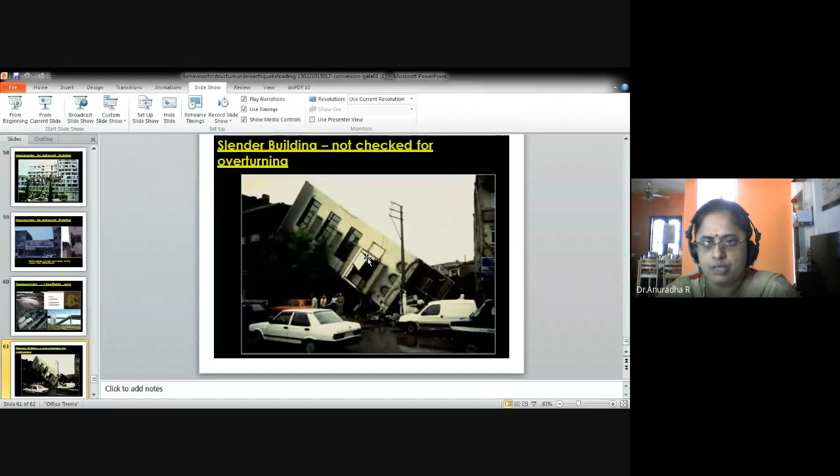Okay, next we will see the slender building, the tall building. It was not checked for overturning, so it was not stable. Hence, due to that, it was overturned and the structure failed. So yes, some design closing remarks.